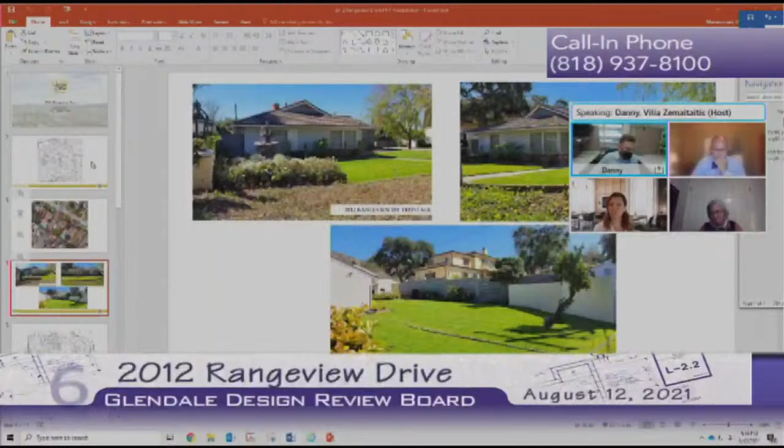Danny? Yes. Apologies. Do you have a PowerPoint presentation that you wanted to show us as well? I do, but how would I do that? Should I share my screen? Yes, correct, please. Right. Sorry about that. All right, sorry about that. And you can start with the first slide then as well. Do you see it right now? Yes, we do. If you start the slideshow, under slideshow. Where is it here? Slideshow. There you go. And from current slide, yes, perfect.

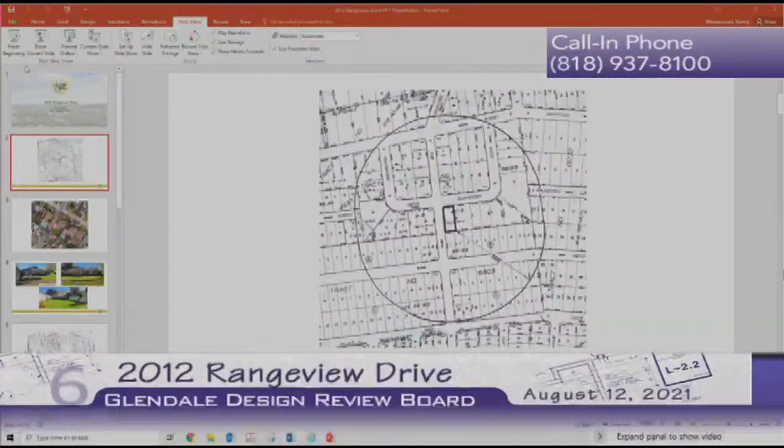Okay. Can you not show the notes? But I can't see my notes on my right side then. It's okay, let me do that. Is it working? Danny, the way you just had it a second ago will be fine. We can see it, and then you'll have your notes that you can read. Is it okay right now? Go back to the way you had it. Like this? Yes. Okay. All right. So, okay, I'll continue here.

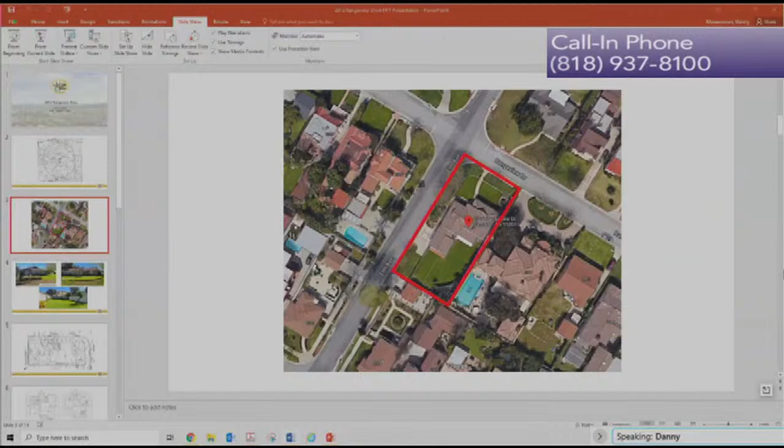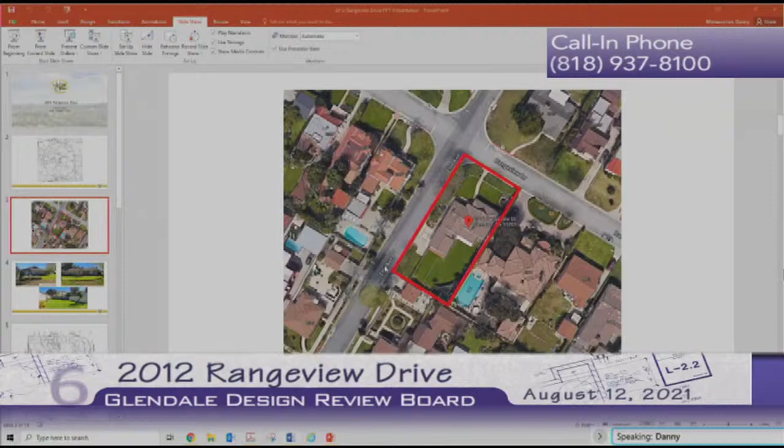The project site is relatively flat and it's a corner lot with frontage on Rangeview Drive. The lot has a regular rectangular shape. It was developed with an existing one-story single-family residence with an attached two-car garage, as you can see here. And the existing house and garage will be demolished as a result of this project. These are a few pictures.

The new two-story house and attached two-car garage in the site plan are consistent with the site planning of the neighborhood, since the neighborhood is comprised of both attached and detached garages. The new garage door is oriented away from the street, which is encouraged by the single-family design guidelines. The front setback will be 25 feet, consistent with the adjoining properties.

The new single-family dwelling will be 6 feet from the east interior property line and 6 feet from the street side property line towards Elm Avenue. The new house will be set back 58 feet from the rear property line. Staff recommends eliminating the circular path detail of the front entry path and providing a direct entry path towards the front entry to minimize paving. As you can see towards Rangeview, there's that circular section.

The location of the driveway is appropriate. However, the width abutting the property line on Elm Avenue is 19 feet 6 inches. A condition of approval has been added to narrow the width of the driveway from 19 feet 6 inches to a maximum of 12 feet. New drought tolerant plants and trees complement the overall design. For the mass and scale, let's go to the elevations.

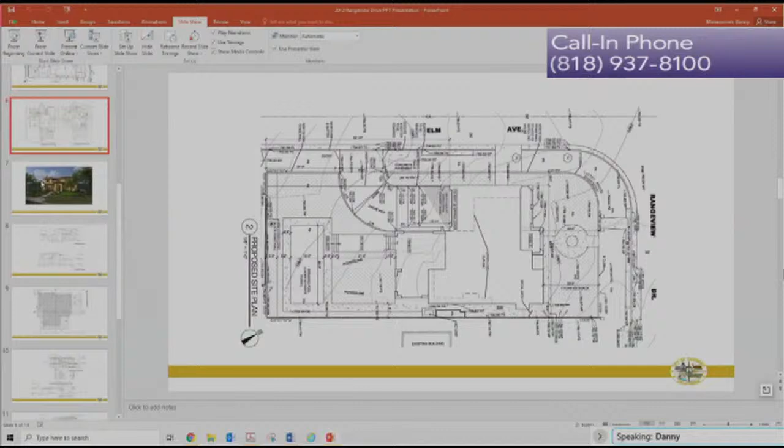The mass and scale of the new two-story dwelling will be larger than the existing development, but will relate to its surrounding context since the neighbor to the east is also a two-story dwelling. The new proposal is appropriate and transitions well into the surrounding context because the second floor steps back from the first floor to break up the mass. When viewed from the street, the second story is recessed from the front portion, diminishing the appearance of monumental size and scale.

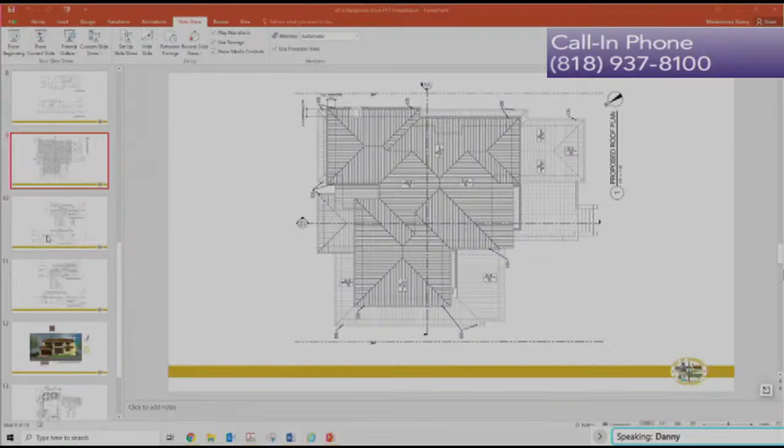Go to the other elevation here. The massing primarily consists of stucco and breaks throughout the development to negate any bulkiness. The new two-story single-family dwelling has a combination of hip roofs with a pitch of 4 in 12. The new roof forms will reinforce the overall building design by using a coherent composition of hipped roofs. For more appropriate scale and proportions, staff recommends adjusting the front entry to match the porch details. Go to the front entry elevation here.

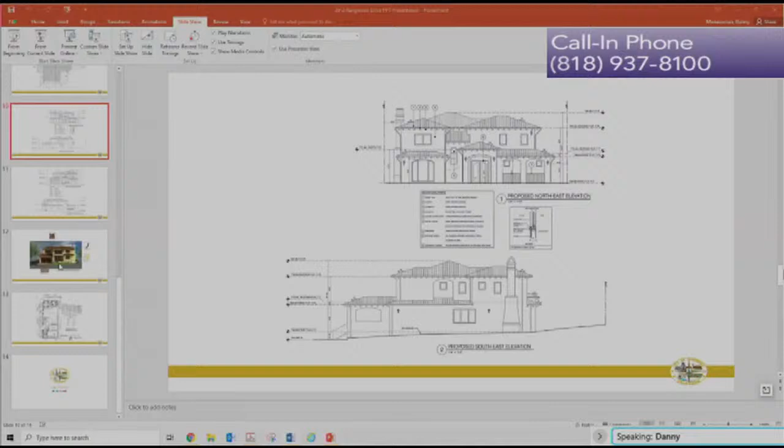The maximum height of the overall single-family dwelling is 27 feet and 10 inches, in keeping with the two-story neighborhood building to the east. The proposed architectural details, materials including stucco finish, wood corbels, S-tile clay roof, and overall material textures and colors are consistent with the architectural concept of the proposed house. What's the materials here? The proposed entry should be well integrated into the overall building design.

Staff recommends a condition. Let me go here. Staff recommends a condition to eliminate the raised height bay of the front entry, extending the covered porch and eave height across the entry and adding an additional window at the second floor to match the two proposed windows. All new windows will be aluminum, a combination of casement and fixed and block frame windows with a stucco edge detail, which is appropriate to the style of the house.

Staff recommends a condition to provide a vertically oriented window at the front facade, second floor bedroom number 3, in order to fit with the vertical orientation of the other two windows on the second floor. The trash storage is appropriately located within the garage out of the public view. Light fixtures are located on the elevations and downspouts are appropriately placed throughout. Staff recommends that the design review board approve this project with conditions as detailed in the staff report.

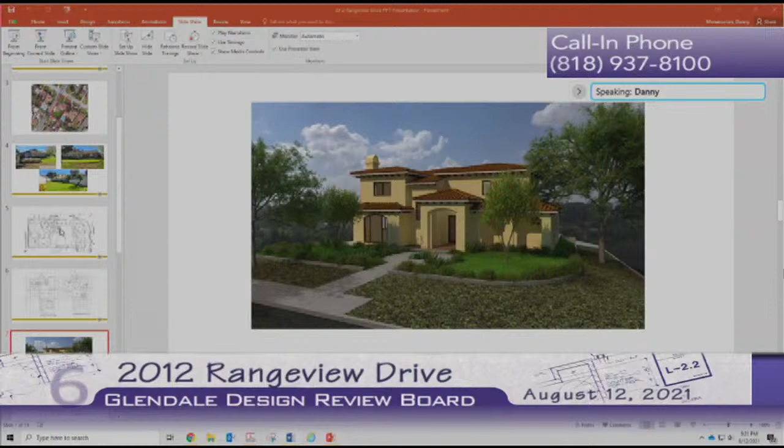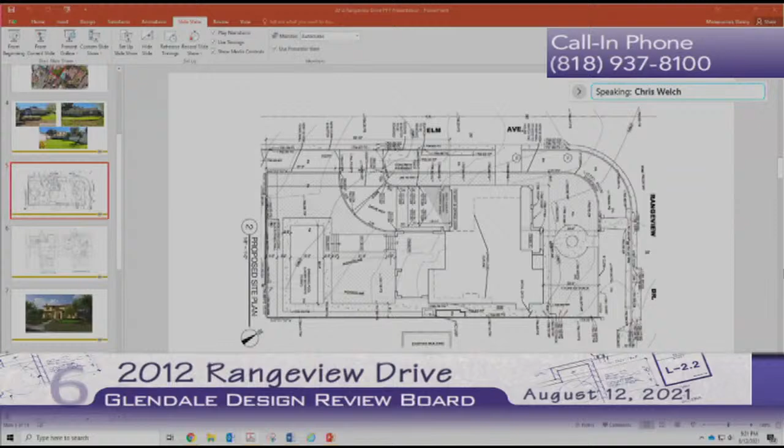We did not receive any comments during the comment period. And that concludes my presentation. If you have any questions, you can ask. Yeah, I have a couple questions on the conditions. On condition number 2, it was written as provide a windowsill for additional detail and articulation. Can you explain what we're asking for here?

Yeah, actually, it's basically a section, and I think that was provided here. Can you see the sill detail here? Yes. Correct, yes. The window sill detail. So that was actually provided. So we were able to put that in this package. So yeah, they did provide. So condition 2 is something that we can consider, not necessarily.

Well, I don't know that the condition was written as well as it could have been. The elevations don't show the sills that are shown on the section. We always ask for these sections so that we can ensure that the windows are recessed when they should be recessed, as in the case with a design like this. Unfortunately, the elevations still don't show sills, at least at the portions I'm looking at on screen right now. So that condition could be modified by the board to coordinate the elevations with that detail to ensure that we see the sills on the elevations.

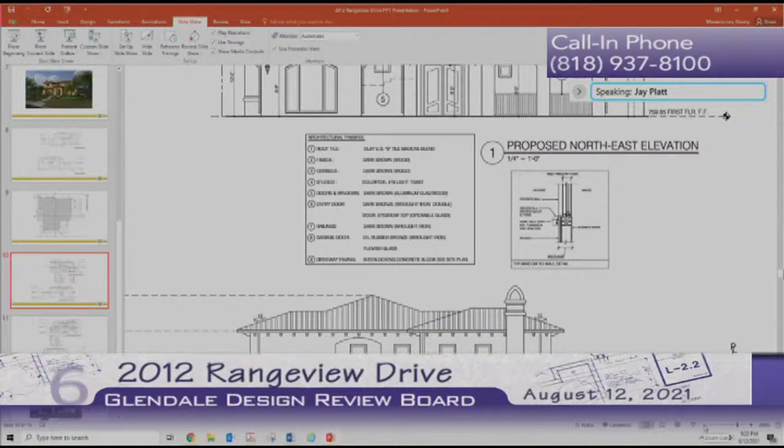Okay, understood. And the next question I had was on number 5, where it says consider locating exit window on side elevation. I wasn't clear on what was meant by that.

Which number was that, sorry? It was condition number 5, and it's the last sentence in there where it says consider locating exit window on side elevation. I wasn't sure what the context was for that. Was it referring to the same bedroom as the other first part of the condition? From my understanding, yes. So locating exit window on the side elevation. I think because the request was to change the front window, the egress wouldn't be met with building code. So it sounded like, to me anyway, when I was reading it.

It's possible. I'm sorry, I wasn't involved with the wording of these conditions, but I believe it's a kind of a standard thing. If the windows facing the street don't meet exiting and the room that they're serving also has a window on the side, we're more open to that window on the side differing a little bit to meet requirements. In new construction, there's really not a huge reason why you can't put a window in that meets exiting requirements.

So if the condition for this upper window is, if this window were split in 2 so that we wouldn't have this horizontality, we'd have 2 vertically oriented windows. We could just make sure that condition reads that the applicant would make sure that those newly redesigned windows would meet egress, which would work fine.

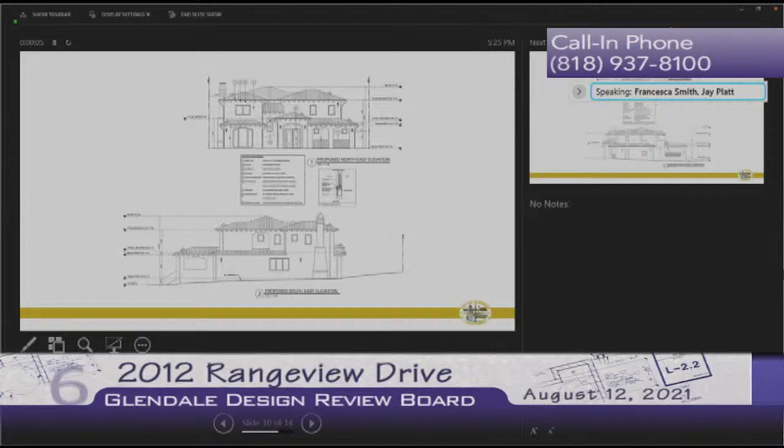First, normally the staff reports we receive say that the properties have been evaluated for historic significance, but they're not significant. This is not mentioned in this one. Was it evaluated? Yes, it was evaluated. It's an oversight that wasn't included in the staff report, and we apologize for that. Sure. But we didn't find the house to be significant. Okay, and could you send me that, Mr. Platt? Send you what? The evaluation? We don't write out evaluations. We do background research and we make an assessment based on the architecture of the property. So we don't actually have that. And I believe that's been the case for many, many years now.

And a problem. I'm curious, do you know who the architect was or the builder? Is this a gotcha, Ms. Smith? No, Mr. Platt, I've asked this many, many times. Or if you don't have that information at hand, which I absolutely understand, could you talk about how this property does not embody the distinctive characteristics of the ranch style?

Well, it is a lovely ranch house, and we see many lovely examples of architecture go away, unfortunately, and it tears little parts of my soul out and perhaps others. But that is standard practice. Not every property is historic, as you know. There's kind of a joke in our field that I'm sure you're familiar with, but for the others, we have criteria for designation. They're often numbered or lettered: criterion 1, criterion A. Criterion C or criterion 3 is usually the one used for architectural significance. But the joke is that some people think we should have a criterion Q for the cute houses out there.

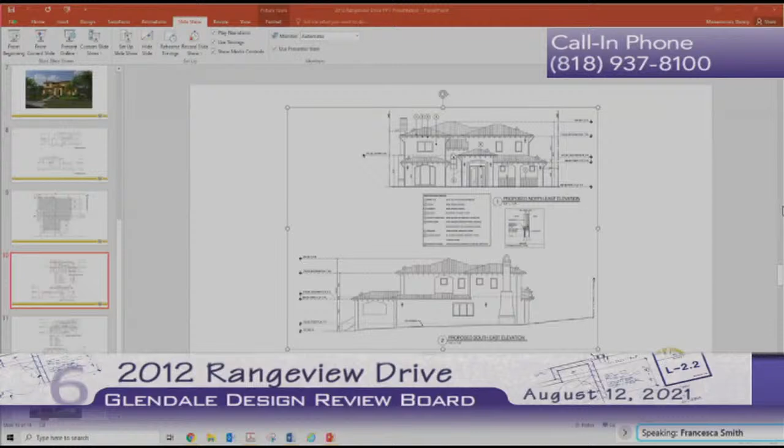So I have a little follow-up. Thank you very much, Mr. Platt. Absent anything written down or provided for our review, it leaves us with this. And I don't mean to belabor this point. I have no desire to put you on the spot, but I end up spending time performing research. To tell you the truth, I believe as a qualified architectural historian that this property is a better example of the ranch style than others you can think of in a local historic district.

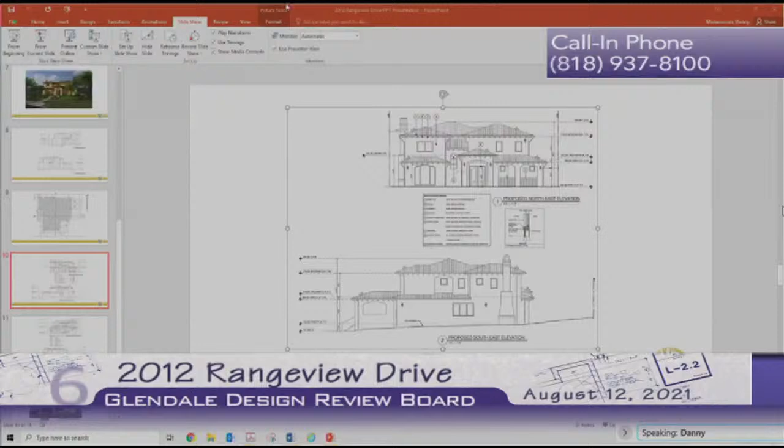I'm not sure what would make, in this case, a ranch style house more significant for its architecture than this. It exhibits the character defining features, it has everything it needs. This would be a magnificent contributor to a historic district. There is no definition of historically significant properties under CEQA that says just because a property has character defining features that it retains and meets many of, that it is by fiat historic. There's ultimately a level of judgment in this process, as there is for any surveyor looking for significant properties in a city. In my opinion, and I'm also qualified under the Secretary of the Interior's professional qualification standards, I disagree with you on this property.

We may have to leave it there. But in terms of submitting any written work, staff has not done that in my time or before my time for each property that we review, though we do make assessments of each property, and city council would have to direct us to do otherwise.

Actually, the Glendale Register criteria, I believe, is the property embodies the distinctive and exemplary characteristics of the style, which in this case would be ranch, the architectural type, single-family home in a post-war suburb, the period, also post-war, and the method of construction, which is wood frame. So I'm not sure what registration requirements could be higher for a ranch style house.